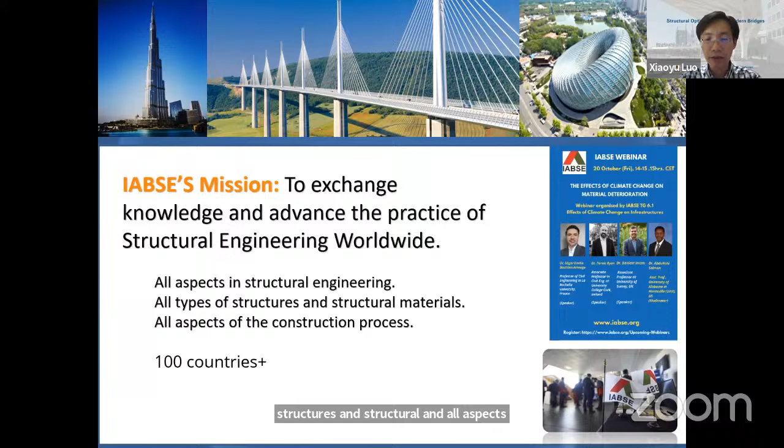Let me introduce IABSE for you first. IABSE is the International Association for Bridge and Structural Engineering. IABSE's mission is to exchange knowledge and advance the practice of structural engineering worldwide, covering all aspects in structural engineering, all types of structures and structural materials, and all aspects of the construction process. Now we have members from more than 100 countries.

IABSE was founded in 1929 in Zurich, Switzerland. Now the president of IABSE is Tina, in Denmark. Our goal covers all aspects of structural engineering: science, arts, planning, design, construction, operation, monitoring, and inspection, and so on.

We have the following objectives: to promote cooperation and understanding among all those concerned with structural engineering and related fields by worldwide exchange of knowledge and experience; to encourage analysis and responsibility of structural engineering towards society's needs; to encourage actions necessary for progress in structural engineering; and to improve and foster cooperation between organizations having similar objectives.

For this purpose, the association organizes conferences worldwide and publishes the high-quality journal Structural Engineering International, which we call SEI, and publishes books reflecting the work of its technical groups. It creates technical groups as required by new needs and technology progress, offers the possibility to join activities within national groups of IABSE, offers a program for young engineers, and presents annual awards.

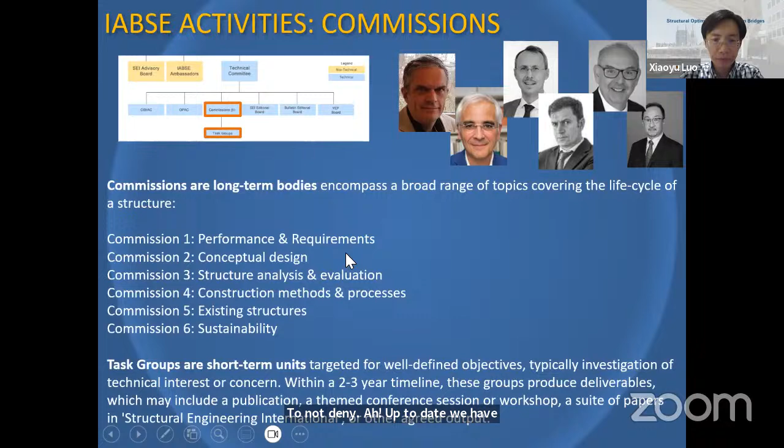We have the activity of commissions. Indeed, we now have 6. To date, we have Commission 2, Conceptual Design. You could find the deliverables and all the successful events from our website.

Under Commission 2, we have Task Group 2.4, Structural Optimization, which is holding this webinar tonight. Thank you, and thank you for your attendance. We also welcome everyone to join IABSE.

Let's continue tonight's webinar. Two topics will be covered. The first addresses structural engineering motivation to design and build new ultra-high performance fiber reinforced cementitious composite bridges, which we call UHPFRC bridges, as cost-effective lightweight structures with original aesthetic expression. Besides stance, basic principles, conceptual design, as well as design optimization and construction will be discussed.

The second topic focuses on structural optimization for pylons of cable-supported bridges, including programming methods of bidirectional evolutionary structural optimization and their application in engineering fields.

The first lecture will be given by Professor Eugen, a good friend of mine, so let me introduce him first. From 1995 to 2023, Eugen Brühwiler was professor for engineering of existing structures at EPFL, the Swiss Federal Institute of Technology in Lausanne. Among his topics, his teaching and research activities include the use of UHPFRC.

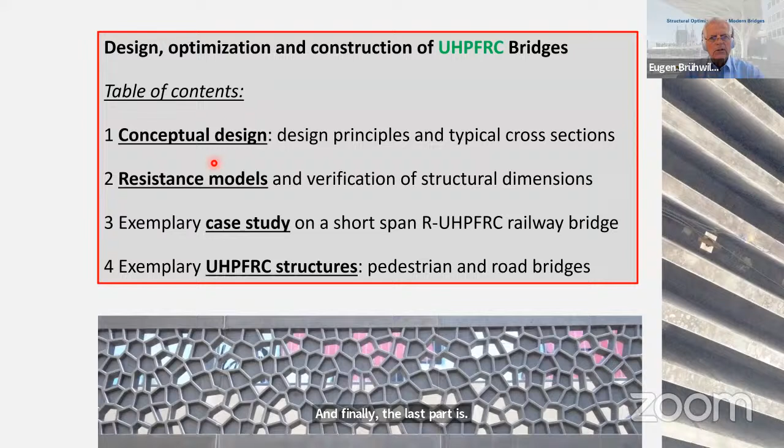The first two chapters are about conceptual design and some basic background regarding resistance models. Then we will look at a case study in order to apply all these principles. Finally, the last part shows you some built UHPFRC bridges.

Now, what is UHPFRC? UHPFRC stands for ultra-high performance, fiber reinforced, cementitious composite material. You see here on screen a cross section through this material. The white spots are steel fibers, a huge amount, and the dark parts are the cementitious matrix. This is a very compact matrix consisting of powders and particles, cement, etc.

It is impermeable and thus watertight, even if you apply a tensile stress under service conditions. This watertightness is actually the guarantee of why this material is very durable.

The fiber reinforcement, the steel fibers, there are at least 3% in volume of very thin steel fibers with a slenderness of 65 at least in this material in order to obtain strain hardening in tension.

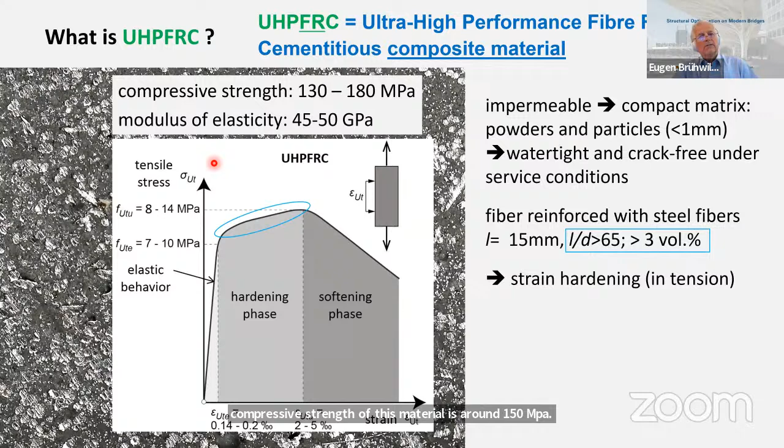We have standards worldwide, in particular a standard in Switzerland that I use often.

Now, why should we build using UHPFRC? The objective is to obtain UHPFRC structures that have a better performance in terms of cost, durability, and environmental impact compared to traditional construction. Traditional construction, I mean reinforced concrete and steel construction in particular. Actually, we take the best of both of these traditional construction methods in order to obtain a new construction method, which also allows for original aesthetics.

We will get lightweight and durable structures with the lowest possible environmental impact. And hopefully this lecture might change your mindset a little bit at least. I will begin with 5 design principles.

Principle number 1: UHPFRC is not concrete, it's also not steel. It is a composite material. It's very important to think in terms of a new type of material.

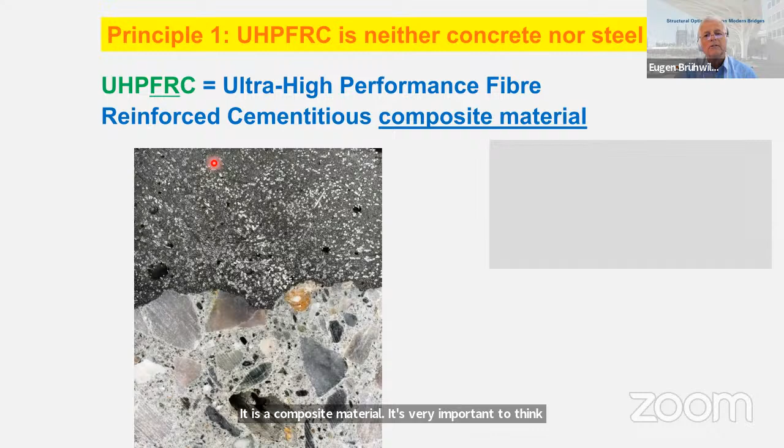The design approach for massive structures like the ones in reinforced concrete does not apply to lightweight structures in UHPFRC. I see several applications using such materials which are quite massive, where you can see the influence of reinforced concrete. Of course, this is not the objective, to replace traditional concrete by this high-performance material. That would lead to ineffective structures, too expensive, too costly structures.

Such materials are under the name of UHPC, which is in many cases just a better fiber-reinforced concrete. They have moderate fiber contents, smaller than 2% in volume typically, and as a consequence, rather moderate mechanical properties. And these materials are, as I mentioned already, designed like reinforced concrete.

This is not the way to go here. So what I'm introducing here today is UHPFRC and the very specific design principles that belong to this material.

Principle number 2 is, of course, we have to explore the material properties of this new material. In particular, the tensile properties: the elastic phase, the strain hardening phase, and also the significant softening phase of the tensile behavior here, the whole domain. We have a quite significant deformation behavior, or in other words, ductility.

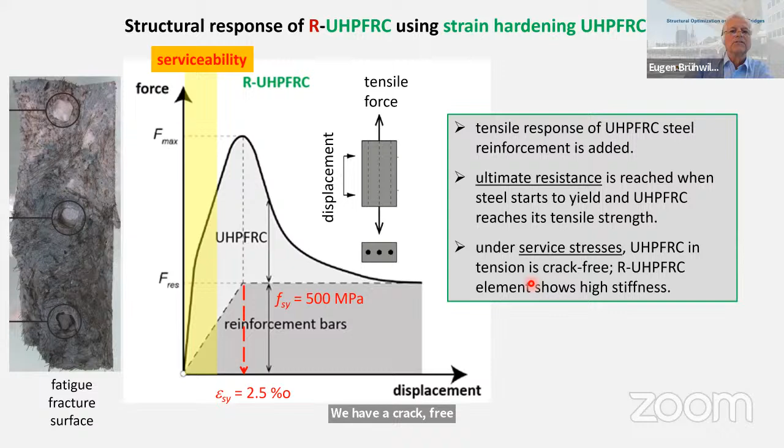Principle number 3 is to design structures in R-UHPFRC, how to exploit the best from traditional reinforced post-tension concrete and traditional steel construction. As already mentioned, we use only the best materials: cement, other reactive powders, superplasticizers, of course. Steel is a high-performance material in terms of fibers, rebars, pre-stressing, and we fully avoid gravel, too much water in concrete. These are the sources of durability problems in concrete.

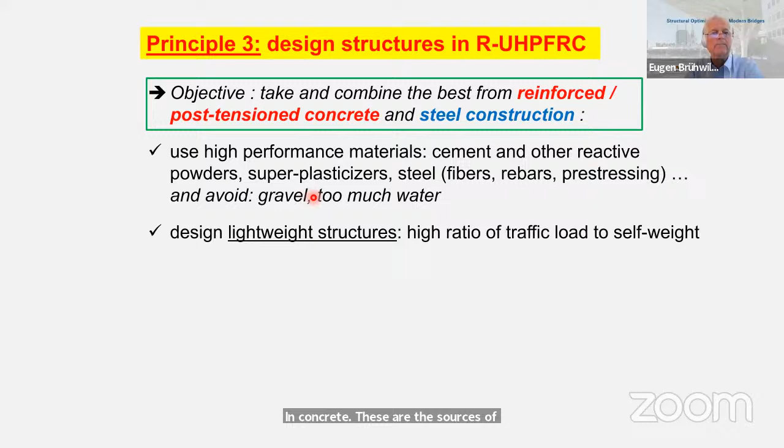And we are seeking and designing for lightweight structures, a high ratio of traffic load to self-weight. We produce precast elements and assemble them by methods of rapid construction that we take from steel construction. We cast, glue, post-tension in order to assemble elements. We do not lose time and introduce problems with welding in order to realize joints.

Principle number 4, optimization of design. The objectives are, we like UHPFRC, but we use UHPFRC with the best possible mechanical properties, and we use the least amount of UHPFRC. So we go for the best, but use as little as possible. That's optimization.

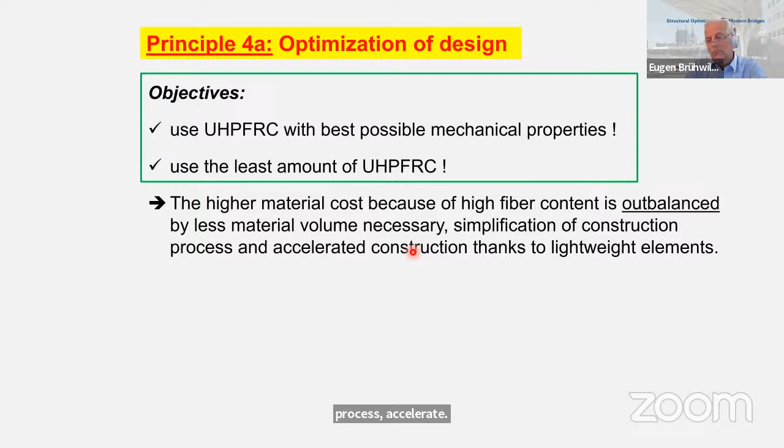The higher material cost because of high fiber content is clearly outbalanced by the lesser material volume necessary. The lightweight elements simplify the construction process and accelerate construction, which also helps keep costs down. Principle 4B, again, is optimization - creating an equilibrium between aesthetics, cultural values and economy.

You see here some points about economy and aesthetic creation: slenderness, boldness, elegance. For the design, the most important thing is to find the best stiffness or rigidity of the structural elements.

Principle number 5 is finding inspiration, and construction history is an extremely rich source of inspiration. For example, François Hennebique, the pioneer of reinforced concrete at the end of the 19th century, is a rich source of what we can do today with UHPFRC. Hennebique would have used UHPFRC at that time if he had the chance to have this material available - he was already thinking in terms of a combination of steel rebars and cement, not concrete.

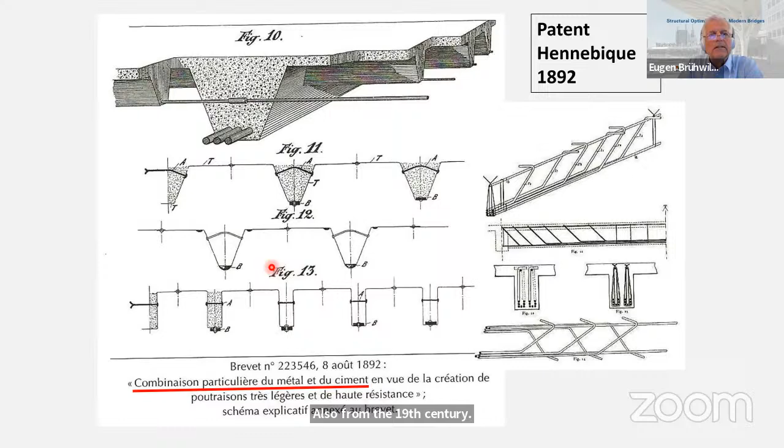So study existing structures made in traditional materials and deduce improvements thanks to UHPFRC. Okay, I would like to summarize this introduction.

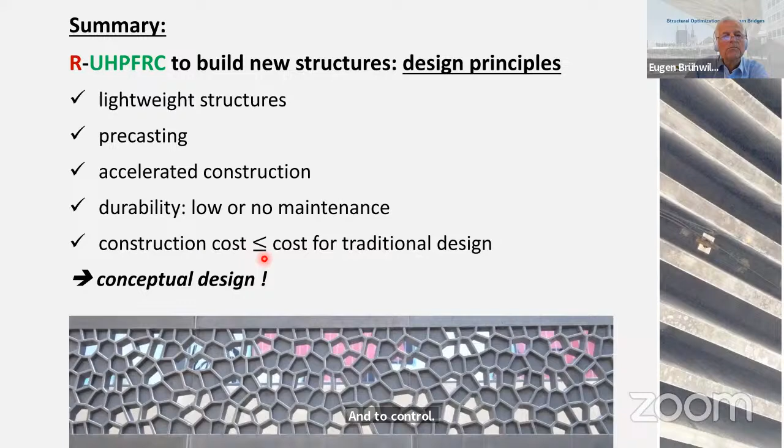We seek for lightweight structures, precasting, accelerated construction. We get durability practically for free, and to control the design, construction cost must be lower than the cost for traditional designs. If you don't achieve this, then your design is not good. In terms of weight, it should be at least 3 times lighter than what you know in case you are a designer in reinforced concrete.

The thickness is such that we can put hollow cores into such a cross-section, pipes for services, and so on. So we are mostly looking at thin slabs and ribs of varying heights, integrating rebars. This is the design approach that we have.

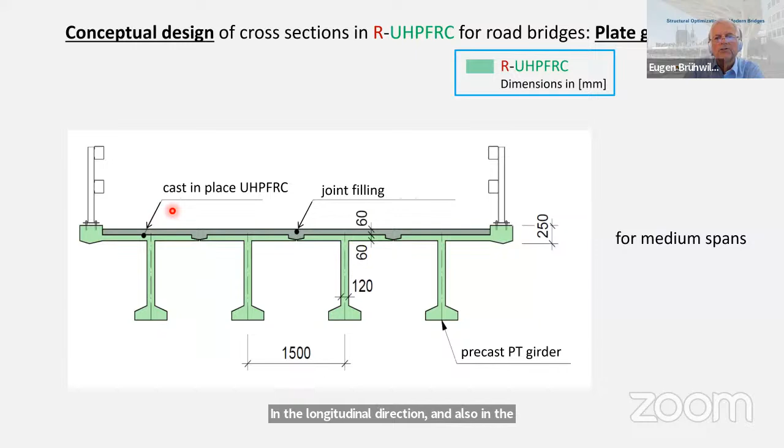Here we look at the box girder, again with ribs in both directions. The slab up here is only 60 to 80 millimeters thin. Of course, we use post-tensioning, which in most cases is external post-tensioning, because we want to keep the web as thin as possible, up to 150 millimeters only. So this would be for the box girder.

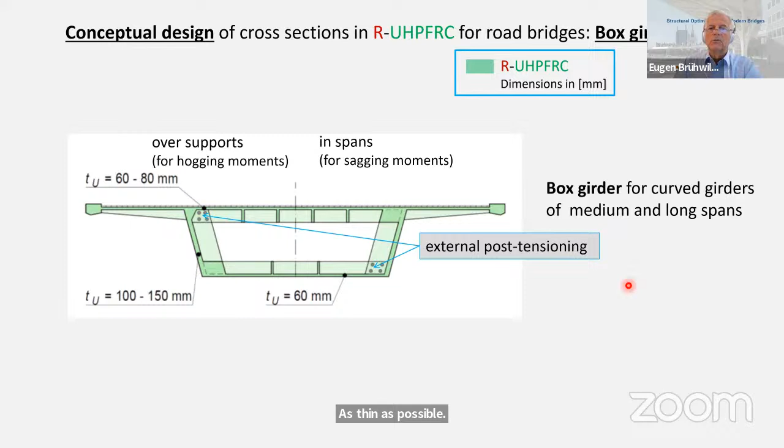For those who are still nostalgic with reinforced concrete, this is a concept of how we should design reinforced concrete nowadays. We can still use reinforced and post-tensioned concrete girders, maybe precast or cast in place, but then the exposed surfaces need to be strengthened here in green with UHPFRC.

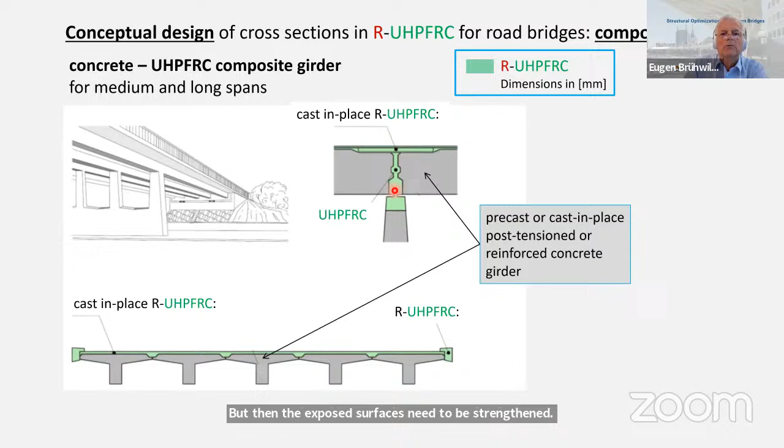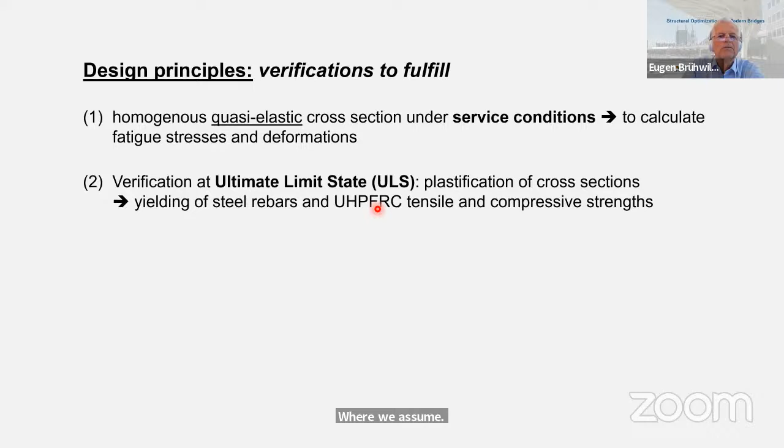So let's have a quick look at the resistance models and how we can verify structural dimensions. Of course, we need to fulfill the common design principles that apply for all construction methods: service conditions, and then the ultimate limit state, where we assume yielding of steel rebars and UHPFRC tensile strength, and on the other side, compressive strength.

Serviceability limit state has to do with deflections, and of course the dynamic behavior is very important since we are working with lightweight structures. But I can already mention from experience with pedestrian bridges that the structures are sufficiently stiff that we do not fall into the dangerous frequency domain in terms of vibrations. Fatigue is, of course, a limit state that we need to check, in particular for railway bridges.

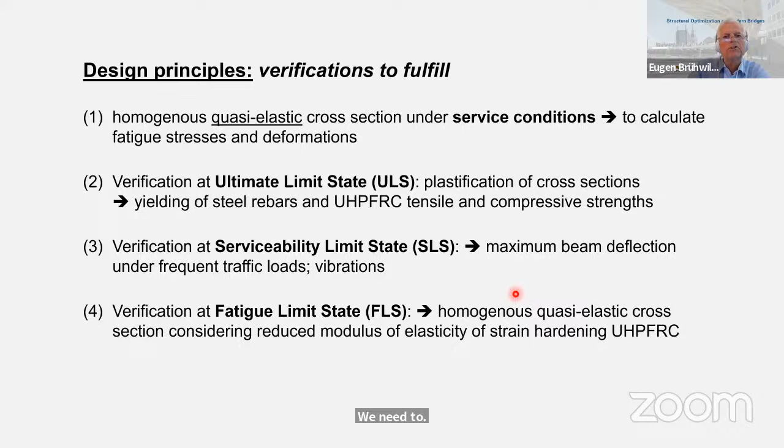The basic format to verify, I think you know all this. We need to find out about the resistance coefficient. We apply in Switzerland, of course, the European concept for dimensioning, and we usually apply a coefficient which is 1.3 for plain UHPFRC.

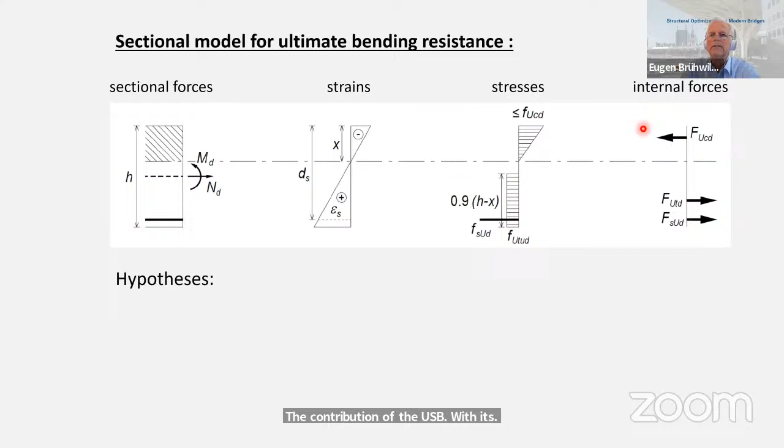The sectional model for ultimate limit state under bending is shown here. We assume that strains remain plane, or cross sections remain plane, under bending. We have a linear distribution of strains. We can then calculate the stresses in the cross section on the compressive side above the neutral axis. We have usually a linear distribution of the compressive stress in UHPFRC, and on the tensile side we have the contribution of the rebar plus the contribution of the UHPFRC with its tensile strength. Internal forces equilibrium allows us to determine the ultimate moment.

Interesting is, of course, shear, as usual. What's new is actually that UHPFRC takes tensile stresses, not only compressive stresses, which enhances the shear resistance to such a point that shear is no longer really a big issue in the design process. So we see some similarity with steel construction, where we usually don't have a concern with shear design.

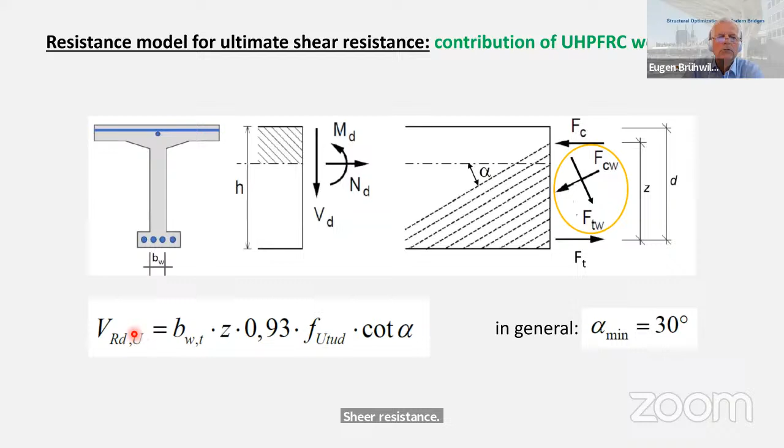Here you see more in detail what the very simple equation is in order to obtain the contribution to shear resistance by UHPFRC. The index U always refers to UHPFRC. Then, of course, we add the contribution of vertical rebars, which can be single rebars - we don't need to put stirrups. Single rebars, well anchored up and down, are very effective in case of high webs, or even integrating post-tensioning cables or pre-stress.

Then fatigue limit state: we need to conduct an analysis of the quasi-elastic sectional stresses. On the tensile side, at the bottom, we have the contribution of the steel rebar - the fatigue stress in the steel rebar - and also the stress in the UHPFRC. Now this stress usually is in the hardening domain, beyond the elastic limit, so that means we need to find this stress distribution by iteration.

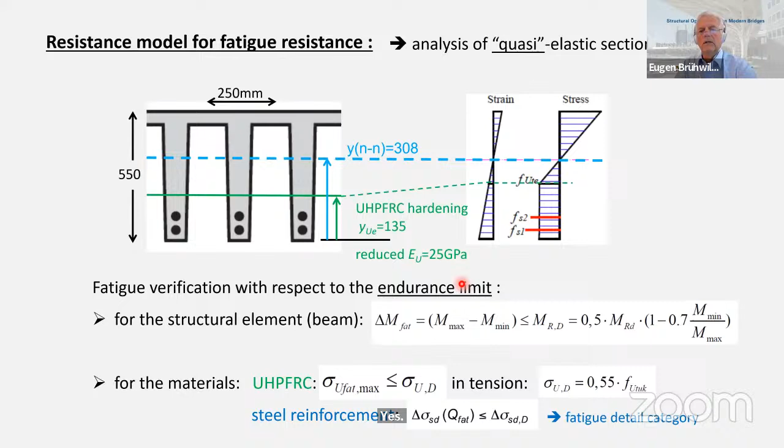Yes, once again, this is for the fatigue design. I will come back to that now.

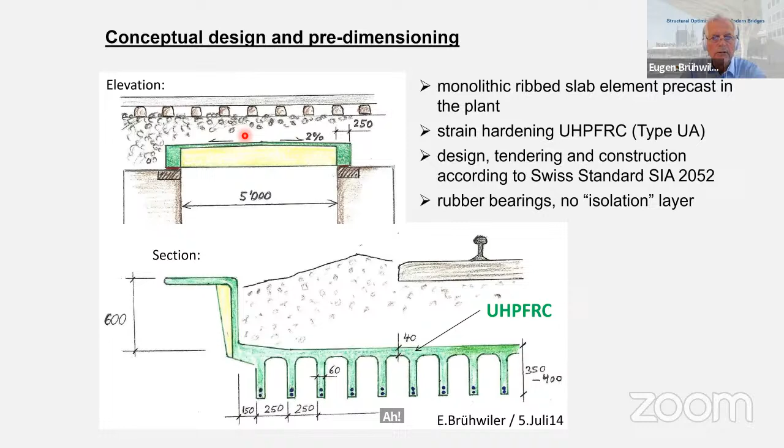This is the third part, the case study of a short span. It's only a 5 meter span railway bridge that we built already 6.5 years ago. I had the chance to follow this design from the initial idea until the quality control at the very end of execution. It's not an impressive structure, but it offers all the difficulties and challenges that you can have in designing bridges, in particular railway bridges, and in particular the design of cross-sections with respect to fatigue, because fatigue was actually the initial, or decisive, design determinant criteria.

So you see on this picture, it is a replacement project of a damaged reinforced concrete structure, and we had a very reduced and limited construction height here. When we look at cost, by the way, it is not just the cost for the material and production of the UHPFRC element - it is also the adaptation, for example, of the railway track, which was not necessary thanks to the use of the new material. And that's a significant cost issue. So what did we build?

We designed a ribbed slab here, a thin slab of 40 millimeters, with ribs containing 2 rebars. That's the slab element, and we have side girders designed for taking impact loads of road vehicles. As I mentioned, fatigue limit state and serviceability limit state was determinant. Here is an overview of this rib slab and the edge girder, with a massive part and the top part, which looks like a structure from steel construction. So the stiffness of the structure was actually really the most important issue here.

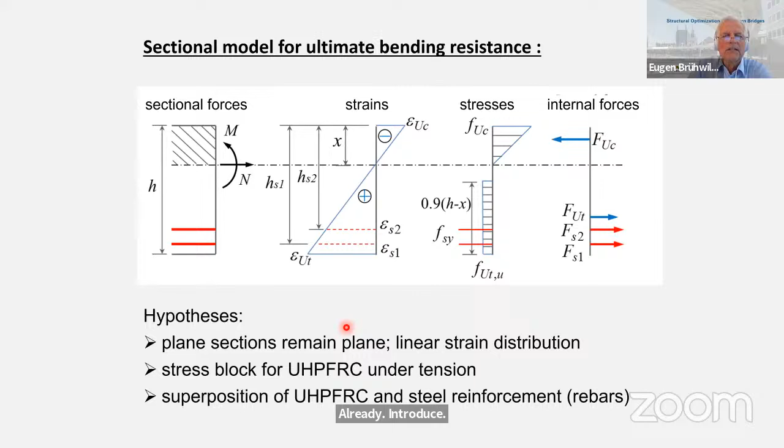Again, we applied this already introduced model in order to obtain the bending resistance, same for the shear resistance. These are hand calculations that I am able to do, and then, of course, the design is always controlled using finite element analysis. But with the hand calculations, you get about 90% right already.

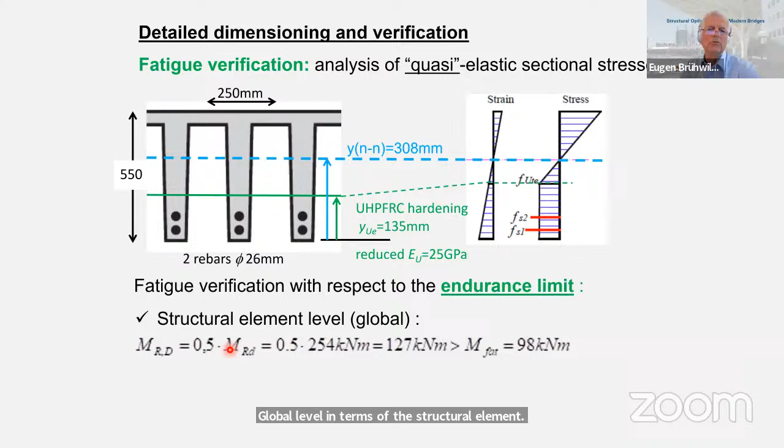Now, with respect to fatigue, very important: we have the lower part of this rib in tension, where we have the 2 rebars, rather thick rebars, in tension, and also the UHPFRC material. It is, however, in the strain hardening domain, and thus loses its stiffness a little bit. We have to find the strain and stress distribution in the cross-section by iteration, but this can be done by hand calculation or with a numerical model. We verify on a global level, in terms of the structural element, a simple verification: we need to keep the stress lower than 50% of the ultimate resistance. This is what this equation says.

And then we check on the material level also locally, in particular that the rebars contain a fatigue stress that is lower than the fatigue endurance limit. That's all - very short and clear fatigue design, but very important in this case.

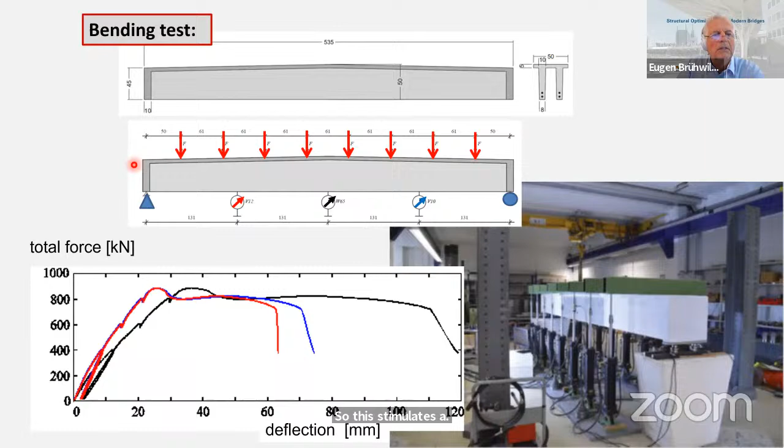We had the chance to do suitability tests on a high girder with 2 ribs. Here we have the bending case, simulating an equally distributed load on the beam. These are the recorded force deflection curves, with digital image analysis in order to recognize and identify some hairline cracks that you would not see by eye.

We have to go up to 73% of the ultimate resistance in order to see some hairline matrix discontinuities, and then eventually we have the fracture. These tests allowed us to determine the beam stiffness, which is an important property for elastic behavior.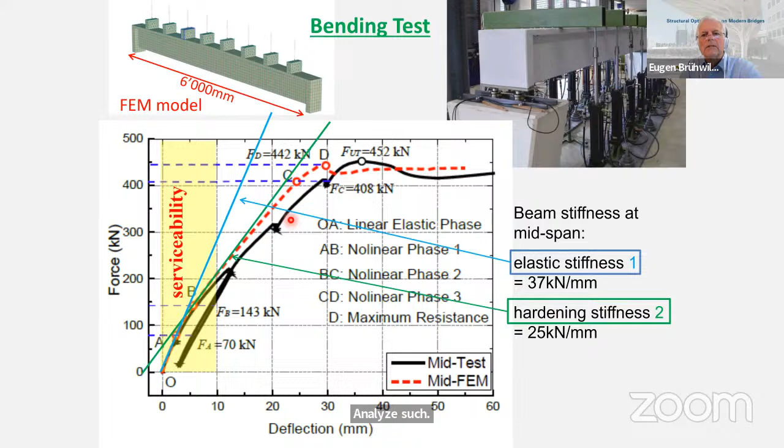Okay, let me go on. Of course, we can also deduce from such structural analysis the cross-sectional stress distribution in order to understand the behavior. We can simulate what is called cracking of the beam, or the cracked zone, and compare with reality.

Let me show some pictures from the construction. All 4 elements were installed in one morning, very fast. We didn't have much time to build all this during a night shift in November 2017. Everything went smoothly - this is very traditional, as if it were an element made of a traditional material. Just a remark: the UHPFRC material cost in this project was 7.5% of the total construction cost.

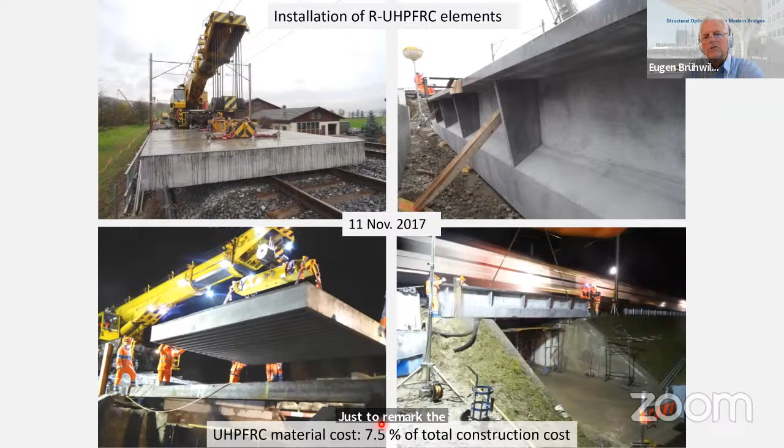Once again, look at this structure after construction and already in service. We did some, or still do, monitoring of this structure, and the allowable deflection of 3 millimeters is by far not reached. This has to do with the over-conservative load model according to European standards.

Over-conservative, which means in this case of a short span bridge, about three times over conservative with respect to reality - but that's another problem we can discuss at some other meeting. We measure a lot of things here. Of course, it's an application with experimental character still, but nevertheless it confirms our design assumptions and expectations.

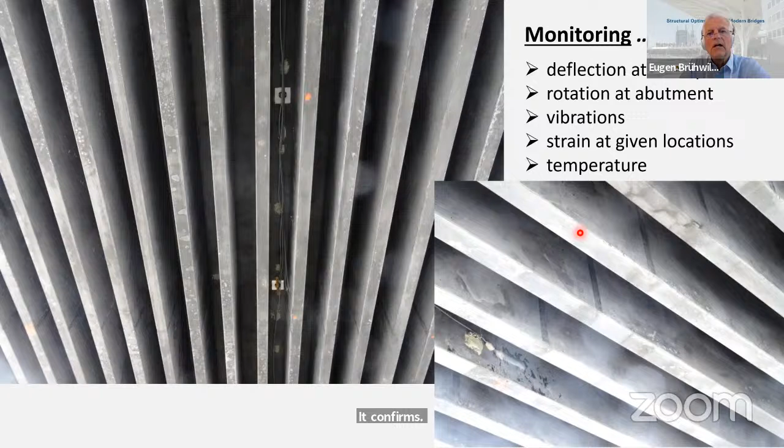This is a view of another short span bridge built 3 years ago, and currently we are working on the next project that will be realized this autumn. There are other projects on the way.

This is a design of a large structure, for those who need large structures in order to be convinced. This is the design alternative in post-tensioned UHPFRC - the cross-section looks more like a steel structure. Down here we have a traditional post-tensioned reinforced concrete design, so we can compare directly the two designs.

For the innovative design up here, we use 4.5 times less building material. We have a 55% lower environmental impact, 22% lower construction cost, 50% shorter construction time. We have all the arguments here - nevertheless, conservative civil engineering will still do the old-fashioned design.

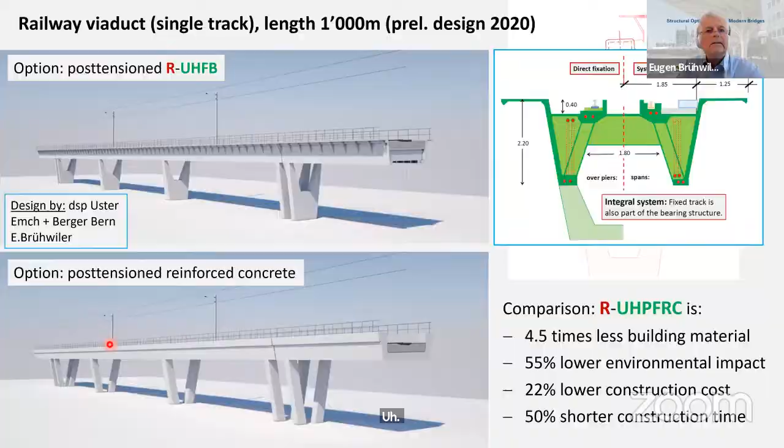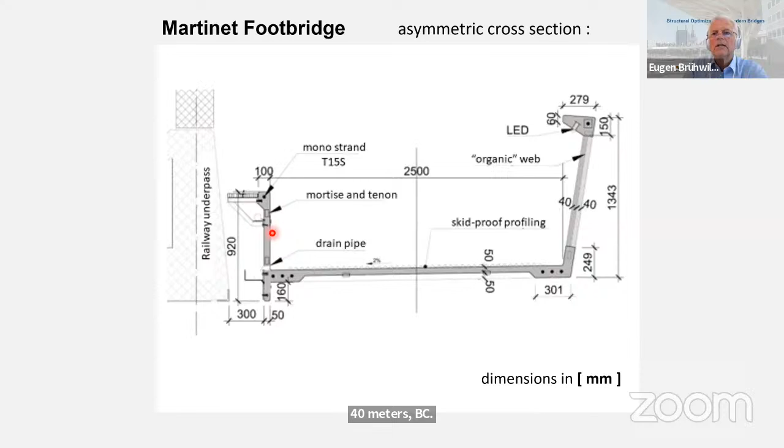And you see here the dimensions in millimeters, 40 millimeters, 50, it's the slab here, and so on. It's lightweight, it's slender. The rebar configuration has only main rebars. There are no constructive rebars like we know them from reinforced concrete.

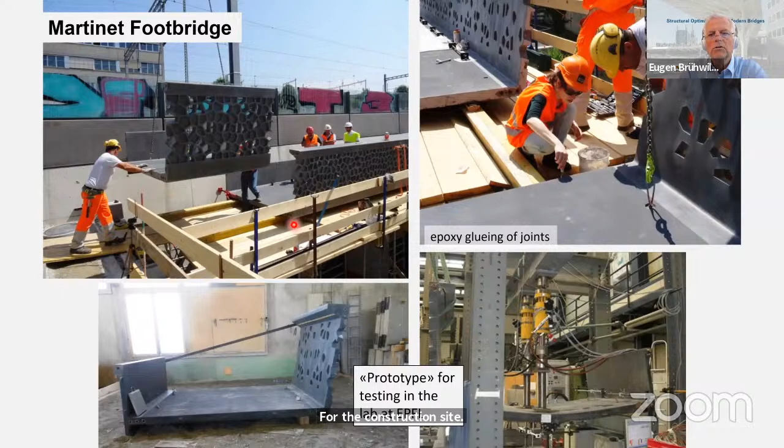Let's look at the construction. This is the matrix in order to produce what we call the organic web of this pedestrian bridge. Installation of the whole bridge, the girder, was done in one morning in an urban area without having lots of place for the construction site. Things are post-tensioned and put together. Here, some post-tensioning - it's a very effective, fast and rapid construction method.

Some impressions from this pedestrian bridge, which has also an experimental character, but works very well in practice. Here, really, we tried out what is possible with this material. Look at this very fine arrangement of details - all of them perfectly well realized.

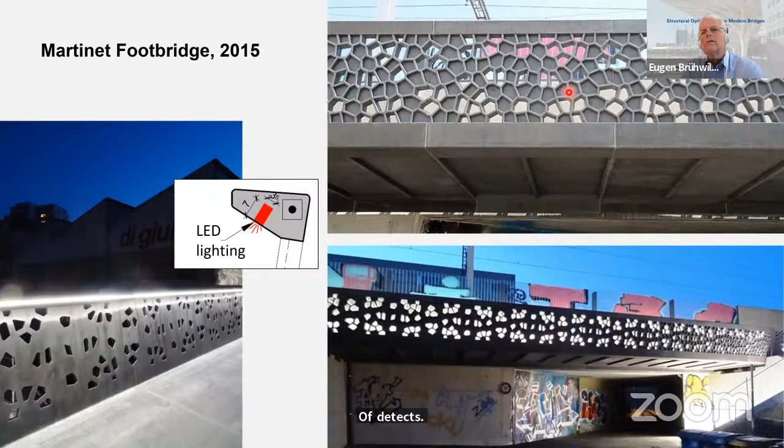Another pedestrian bridge, also with a U-shaped cross-section, from the design sketch to the construction plan, 26-meter span, no particularities to realize in such structures. It became like a routine construction.

Another view, and this is a particular pedestrian bridge over a railway line. Everything is in UHPFRC, post-tensioned UHPFRC. Everything is monolithic. There are no bearings and other things that need maintenance. It's all fixed, monolithic, put together.

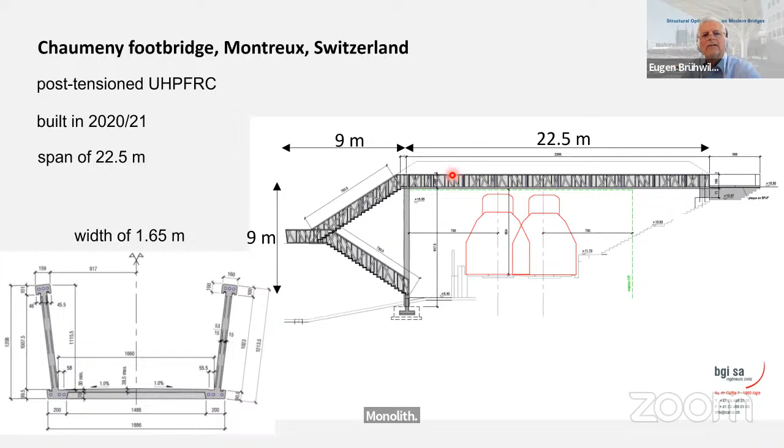It's all precast and mounted in one night over the railway line in an urban area with no access to the construction site. Things were lifted in by a big crane, with the advantage that the elements were, of course, relatively lightweight.

Some other views - we are in the town of Montreux. Some of you might know it because of the jazz festival. This is a road bridge, 26-meter span. Again, we had to limit the girder height to the least minimum.

We have 1.25 meters at midspan and only 0.75 here, because otherwise the construction cost for adapting the road on both sides or going deeper with the river would have exploded. So we have just the perfect solution here in order to accommodate for all these severe requirements.

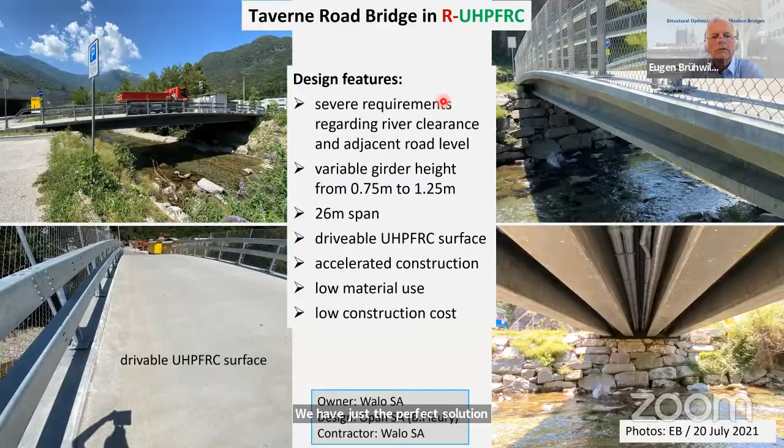And here we fully applied this basic principle that I introduced before at the beginning - precast girders and then cast-in-place UHPFRC in order to form a monolithic structure.

Even though we cast in place UHPFRC, we go beyond this very critical joint detail - there is no dilation joint. We go onto the road, and we have some joint detail here on the roadside. So this is quite original as a detail.

Some impressions from the construction site: precasting of the girders, placing them, casting the UHPFRC. Actually, this process took 5 working days, so that's rapid construction. And the cost was very low compared to other designs - it was by far the design with the least cost compared to traditional designs.

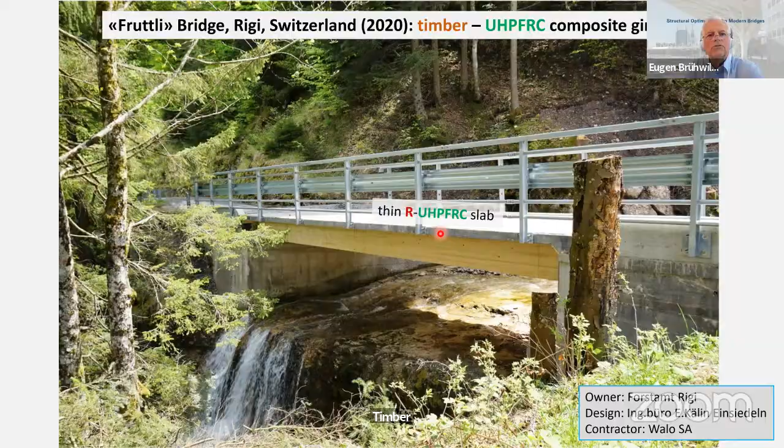Here a composite girder, timber, and a thin UHPFRC slab. Of course, this is very interesting in terms of CO2 emissions. Very easy to be built, in particular using the appropriate material, timber, in an area where we are actually in the middle of a forest.

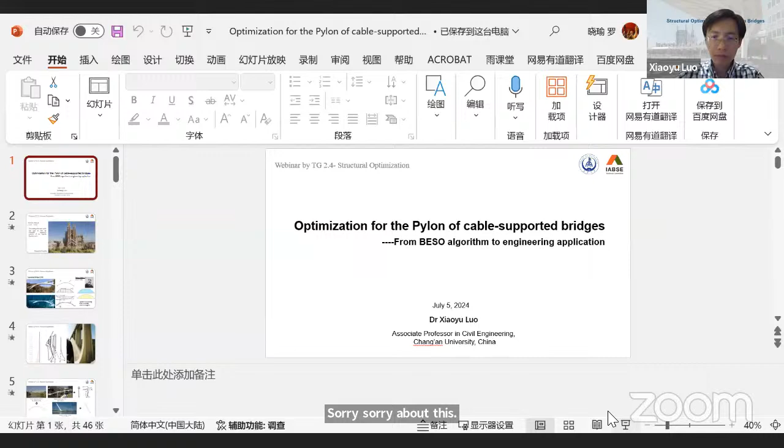My topic is about the optimization for the pylons of cable-supported bridges, from BESO algorithm to engineering application.

When we talk about structural optimization, we could look back to the 19th century. The sandbag cable arch model was used to find the reasonable hyperbola of the Sagrada Familia's vault, a test finished by Antonio Gaudí. The sandbags were used to find the shape, attracted by the earth through gravity. When we put the model upside down, this shape should be the best shape to resist gravity. That's the very beginning of structural optimization.

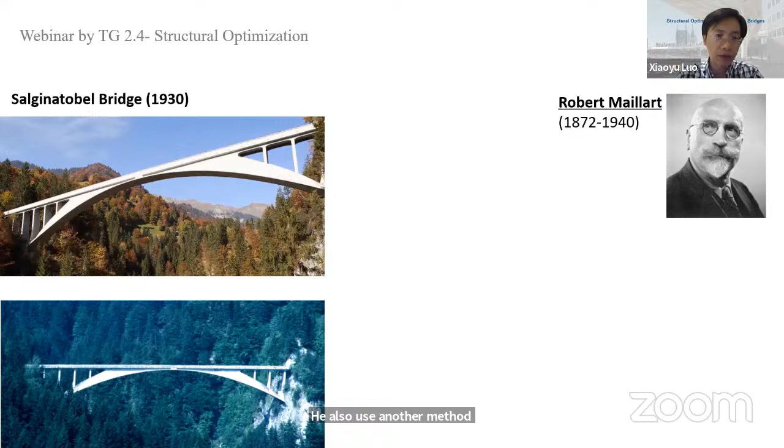Until the 1930s, a famous designer called Robert Maillart also used another method to finish the conceptual design of a notable bridge. He supposed these two points have force concentrations, and with these two force concentrations, the negative bending moment looks like this—this is the same because it's a three-hinge arch. This is the bending moment caused by the horizontal thrust. When we put these two bending moment diagrams together, we find this is the resulting shape, and this is just the same shape as this structure.

So designing or making optimization according to the bending moment is a very useful thing for the structure to have better performance. In this case, Robert Maillart also enlarged the shape of the piers.

Let's look back to the cantilever elements. When the winds are attached to the piers, the bending moment goes like this, just the same shape as the piers. That's very interesting—that means even in mountain regions with strong winds, this bridge will be safe and have better performance.

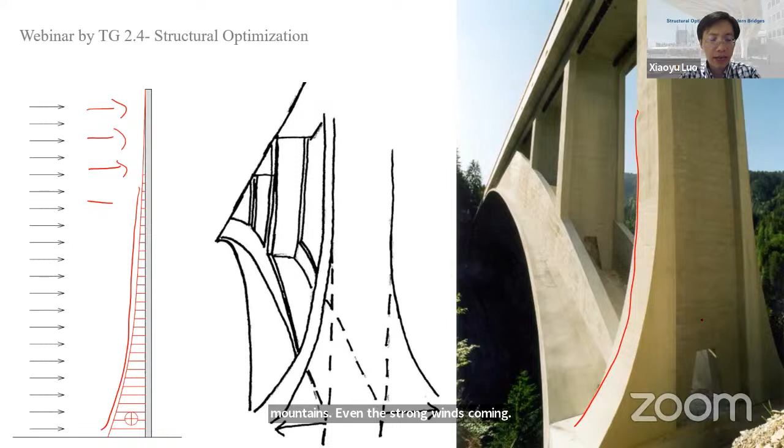Let's look a little earlier, at the Maria Pia piers by Gustave Eiffel. You could find that Eiffel used the same shape as the two-hinge arch's bending moment—the same shape.

That's very interesting. In 1992, the Alamillo Bridge by Calatrava also shaped the pylons according to the bending moments of the live loads. And the Sunniberg Bridge in 1997 by Christian Menn also shaped the pylons—here's the connecting point, or the curved branch points, according to the bending moments. The bending moment here is just zero. This is a very amazing method for structural optimization.

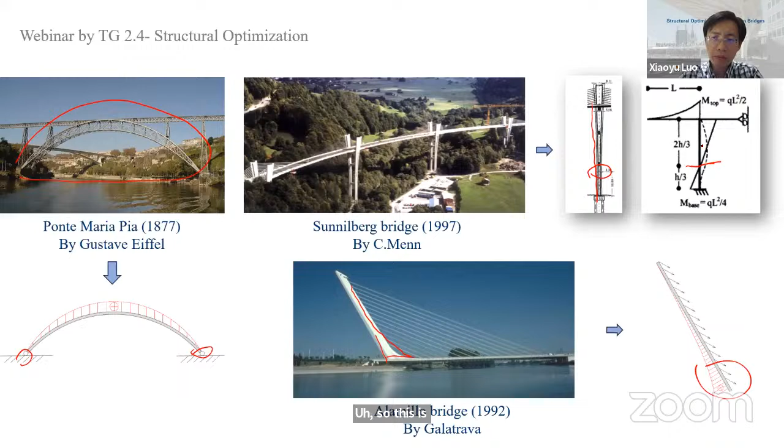But now in the 21st century, we use computers to aid the design. We do structural analysis and drawings—could we also do structural optimization by computer? I think the answer is yes.

So these are our contents about structural optimization by computer. First, I'll talk about the concept and stages of structural optimization. Then I'll explain the theories of bidirectional evolutionary structural optimization, which we call BESO. Then we'll go through the BESO algorithm. Then we'll talk about engineering applications.

When we talk about structural optimization, there are three levels. The most basic is topological optimization. The second level is shape optimization, and the third is size optimization. These correspond to the conceptual design stage, preliminary design stage, and detailed design stage. Let's start from the detailed design stage.

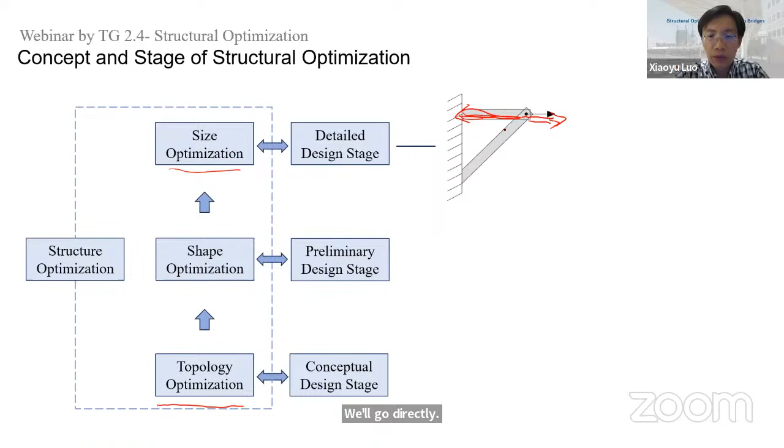But in size optimization, we cannot change the critical points of the structure. We could not change this. We just change the size of the elements.

Second is shape optimization. Take this case: we have a hole inside the plate and we apply a load to the right. The load has to be transferred to the foundation directly, but there is a hole, so the force has to go like this instead - not directly. After shape optimization, the hole becomes more slender, letting the force go more smoothly to the foundation.

But the hole will not disappear under this level of optimization, because we can only change the shape of the hole - we could not eliminate it or fill it in.

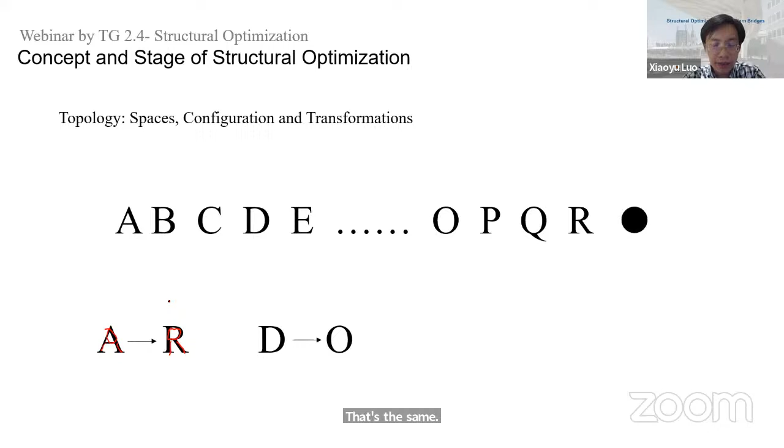In the alphabet, the A and R are the same topology because they each have one shielded area and two bracing lines. D and O are in the same topology because D has one shielded area and O also has one shielded area - different from B, which has two shielded areas.

From D to C, they are not the same topology because C is open while D is shielded, with one area. O has one shielded area, while J has no area inside at all. So this is topology: if the configuration of objects are the same, we treat them as the same topology; if not, we treat them as different topology.

So topology optimization means we could change the configuration of the object freely to find the best shape to support the load. In this case, we have two fixed points, and if we apply two loads from the top middle, step by step we find that the shape will be optimized like this, because in this situation the load is transferred to the foundation directly. This is supposed to be the best configuration for this case.

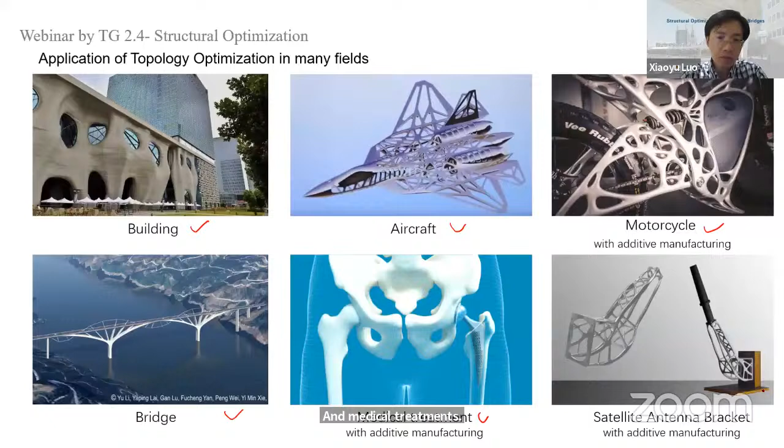Today, topology optimization is applied widely. We find it used in buildings, aircraft, motorcycles, bridges, medical treatments, satellite antennas, brackets - it's very widely used.

Today I will introduce one very simple and easy to use method called BESO. Now we will try to learn something about the theory of BESO. Before talking about the theory of BESO, I will introduce ESO first.

The evolutionary structural optimization (ESO) method was proposed by Yimin Xie and Steven. This optimization method was proposed to improve structural efficiency and shorten the design cycle. The inefficient materials in the structure are gradually removed to allow the structure to evolve into an optimal form.

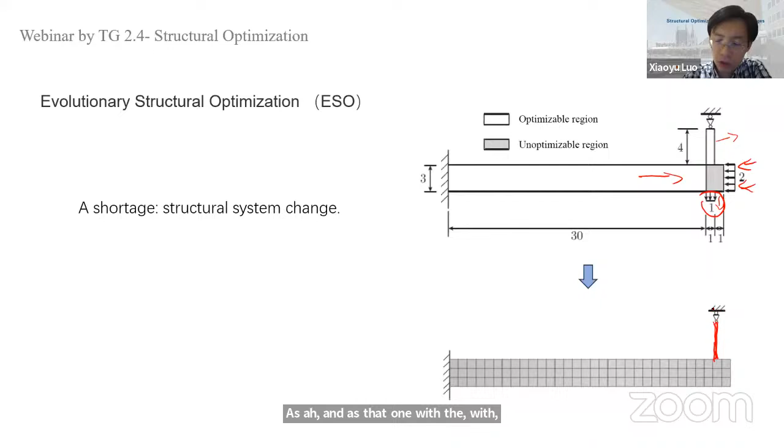Another situation is that the matrix could become singular, like in this case where the stress surrounding here is less, and then we removed elements and some remain in the middle. Now the matrix becomes singular and the calculation stops. Indeed this is not a very good solution.

So how do we treat this shortage? Yimin Xie and Steven proposed another method called bidirectional evolutionary structural optimization, which we call BESO.

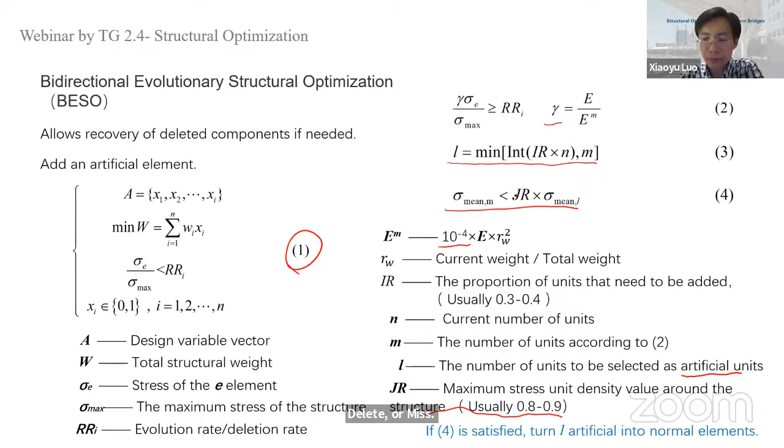There's the question of when to quit the cycle. We need to run the cycle again and again to select useful units or elements and keep them. We need to define sigma max 0 and V0, the very original initial domain, for the first cycle.

In the first cycle we mark them out, and in every cycle we find sigma max at cycle I, and at that time V, meaning the volume at cycle I. Then we compute sigma max 0 times V0 divided by sigma max I times VI, and this is PI. If PI drops during the cycle, then you could quit, and that would be the best suitable solution.

So that's the theory. With BESO, the efficiency was improved like this, and elements like this will not be deleted in the end. Instead they become very slender elements, and this one could undergo optimization like this, becoming slender, while this one is already kept.

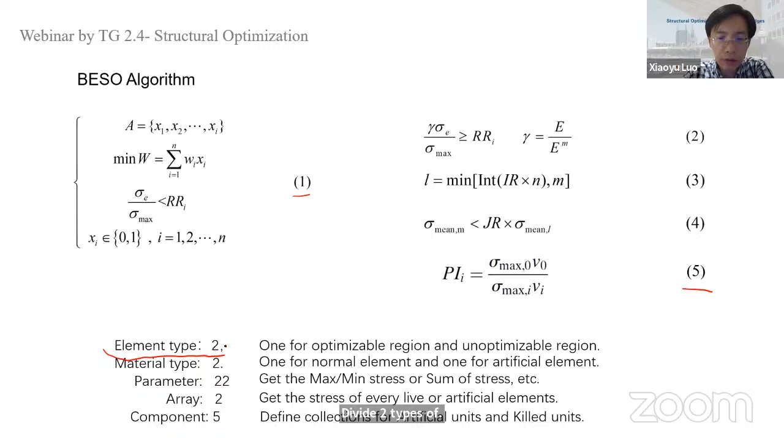When we try to make the program for this algorithm, we need to first define two types of elements: one for optimizable region and one for unoptimizable region, and two types of materials: one for normal elements and one for artificial elements.

For parameters, we need at least 22. We have to get the max, minimum stress or sum of stress, and so on, and element number and so on. For arrays, we need 2 arrays to get the stress of every live or artificial element, one for the live elements and one for the artificial.

Then we have to calculate and determine whether they meet the standard or not. If they meet the standard, we could bring them back. If they don't meet the standard, we could delete this unit finally.

We also need 5 components to define the collection for artificial units and killed units. The component is named group. We put all the artificial units into one group so we can select them easily in the next cycle, and we put all killed units into another group so we can easily select them out in the next cycle to bring them back.

So this is the program. I use the APDL of ANSYS to make this program. First, we divide into 2 element types, using plane 82, and we divide into 2 materials: one for the normal elements and one for the artificial elements. You can see they differ by powers of 10 to the -4.

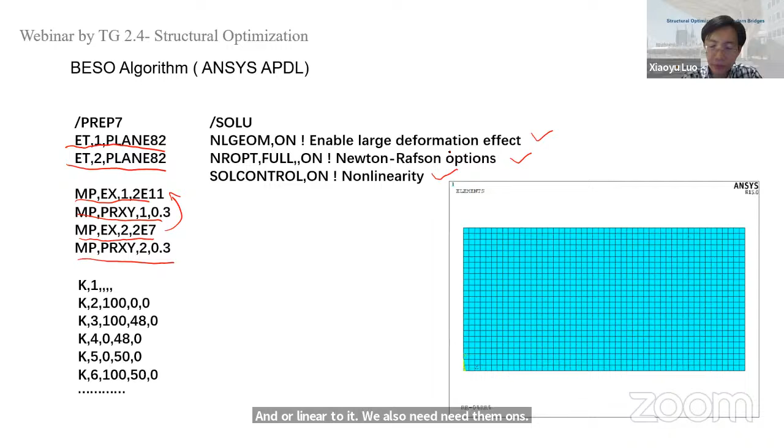After this, we need to set the evolution rate, such as 0.03, and also define the terminal rates, starting or terminal of the evolution, from 0.03 to 0.2, and also set the evolution step. This is the step. Also, because in every step the elements will become fewer and fewer, we have to redefine the mesh to keep it good.

So this is the command for redefining the mesh. Then in the program, we have to set parameters to get the stress in every cycle: the maximum stress, minimum stress, the sum of the stress, and so on, and the amount of live structural elements.

This part is actually somewhat difficult. You can pause the screen, and after this webinar you can try it in ANSYS or another programming language — it would be the same.

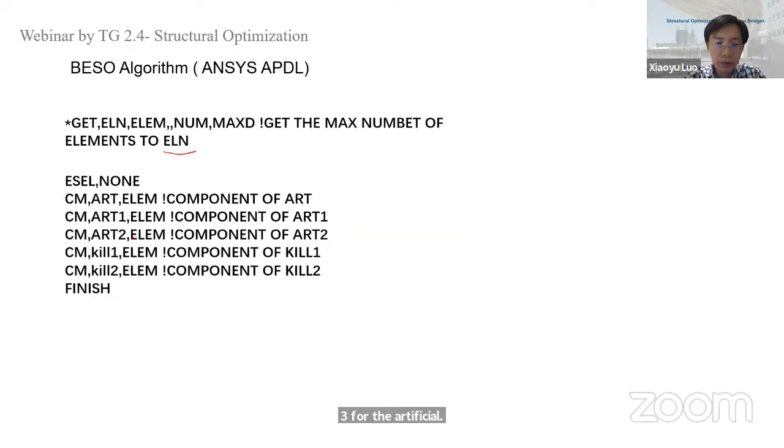Then finish, and we give the boundary situation, like fixing here and applying 2 forces in the middle of the top surface, and then we solve.

After the calculation, the first important step is the post-processing — we get all the stress into a table, and get the measurement, the sum of the stress, meaning all the units' stress summed together and given to TS.

Then the amount of live elements will be counted and given to SEL. Then we find all the live structural elements and their stress, and give them to the result array — this gets the stress into the result arrays.

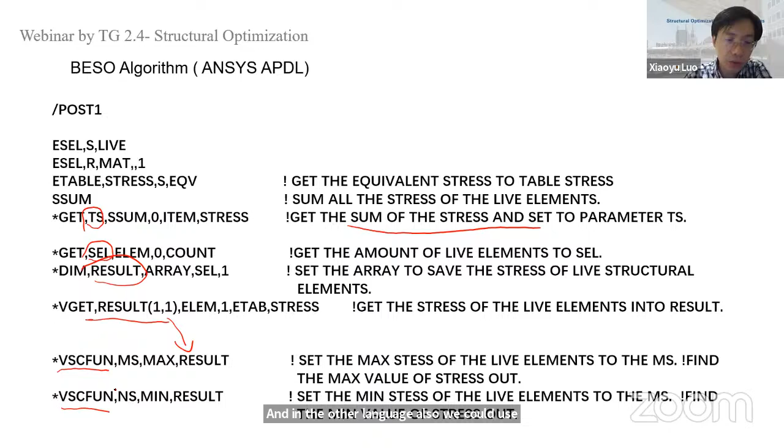Then, between these result arrays, we have to find the maximum stress unit and the minimum stress unit. We could use the VSCFUN function in ANSYS, or the same kind of function in other languages, to find the max and the min for the next calculation.

And then we select the type, and we select mat1. This is the standard, R0 is the evolution rate, and ms is the stress, and we select this element with the low stress. This means less than R0 multiplied by ms. All the stress less than this will be selected and killed - kill this material or kill this unit.

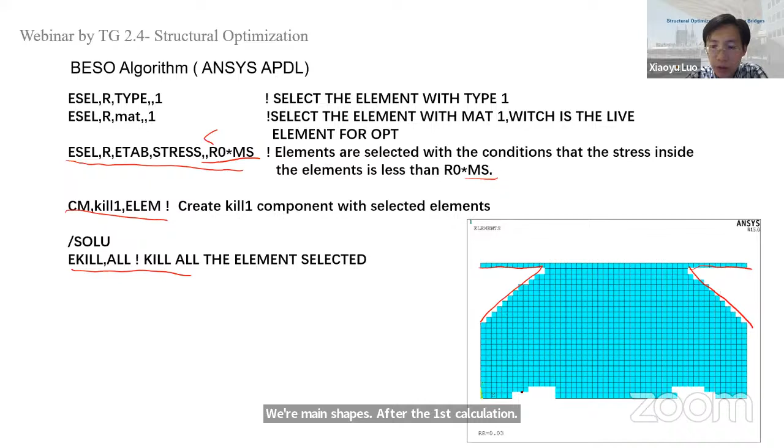And this is the main shape after the first calculation, and we could see that this part with low stress was killed. But this is just for the ESO - we just kill the element, but we have to get them back with the artificial elements. So now we have to do the artificial ones.

We all know that each element has four faces, 1, 2, 3, 4, so we set the face 4. That's for 2D. If for 3D, we know that they have 6, so this face should be changed to 6 in the 3D situation.

And we have to find out the elements adjacent to this one - 1, 2, 3, 4 elements adjacent to this one. And then we will select, if they have, we select them now. 1, 2, 3, 4. And if this 3 and 4 belong to the live elements, then we have to select them out and keep 1 and 2. This is the artificial elements.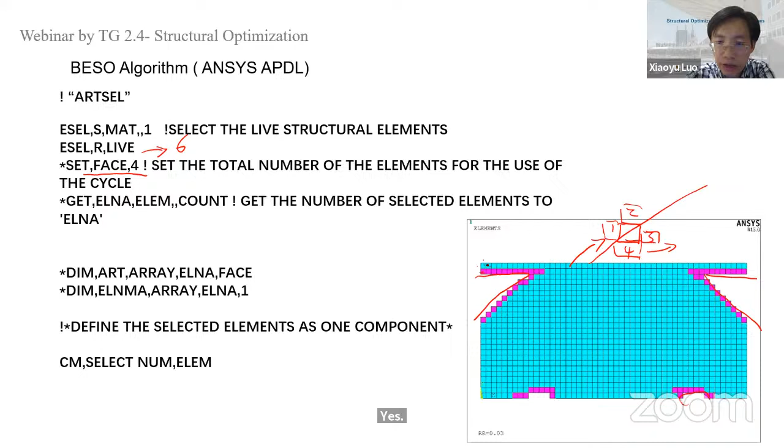You see, this one we have nothing, yes. So these 2 are yes, 3 and 4 are yes. But 3 is already a live element, so we have to select it out. Here we have to select these 3 out and keep element 4, becoming the artificial elements.

From a cycle, we have to tell one by one, and then we find all of the elements adjacent to all of these elements, and then we select. Here we select the live element, and then we keep the element adjacent to the existing elements.

So by this way, we can choose the artificial element out, and this 4 is the artificial element - by selecting all of the adjacent faces, and then we select the live elements. And then the remains should be the artificial ones.

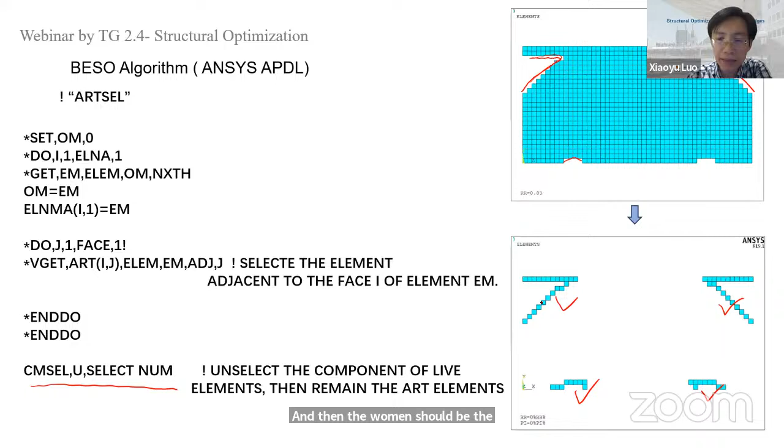And then we will do the next calculation to tell if this is large enough to be kept or not large enough. Then we will remove this element at that time. So this is the artificial element step that we have to define.

And then if we need to keep it, we will change MP to material 2 and leave them all - that means call them back to be the artificial element. And next round, we have to tell if the stress in this element is becoming larger or less. If larger, we give them back, and if less, we remove them at that time.

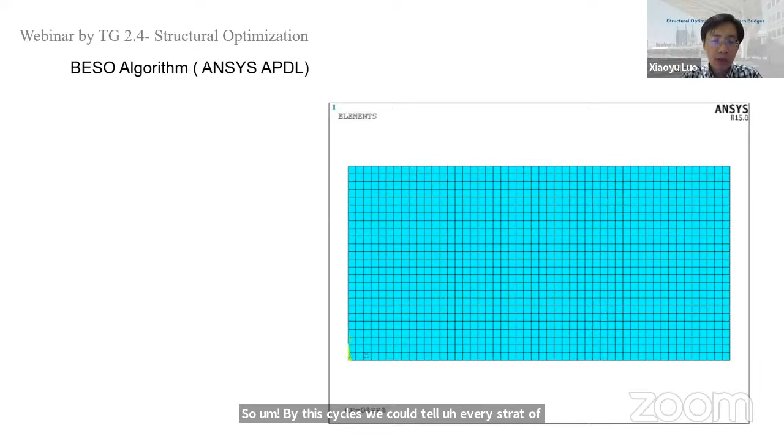So by these cycles, we could tell every stress of every unit, and then we delete them or get them back. So step by step, the shape of this structure will become the best suitable shape, getting out step by step.

It's worth mentioning that in this step, indeed this element was isolated at that time, but nevertheless, because we could get the artificial material back, it didn't become strange, so the calculation could carry out.

And a very interesting phenomenon is that we could go from the maximum number of elements and step by step find and delete. And actually, we could start from the minimum number of elements, and step by step the artificial element will be added, and the necessary one will turn back into the normal elements finally. And the low stress one will be removed, and then step by step we could find out from there.

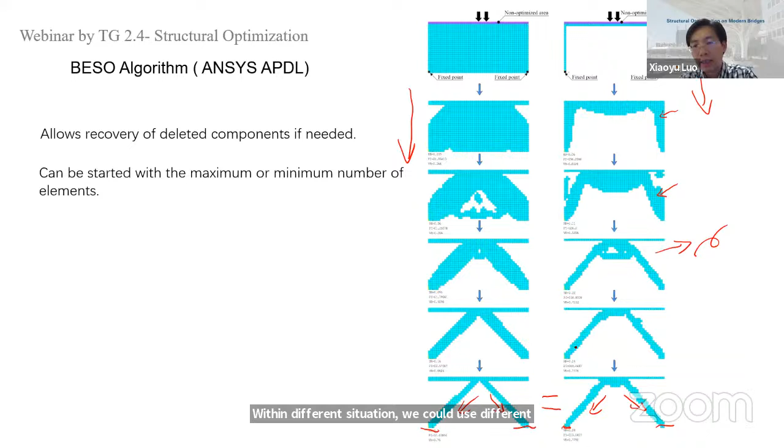So within different situations, we could use different methods. One is delete step by step, the other is get them back step by step. And the MP ones - queue all the MP ones first and get them back step by step. These are two very interesting algorithms.

And so by this method, I think you should know the theories of BESO, and you should know how to make the program of BESO. Now we could take a look at the engineering application.

Here is the first case, the Hangrui Dongting Bridge in China. This bridge is a suspension bridge with a main span of 1,480 meters. That's a long suspension bridge, and this bridge is located here.

This is the Yangtze River, Changjiang in China, and this is Dongting Lake in Hunan province. It's worth mentioning that beside the bridge site, they have this very famous traditional Chinese building called Yueyang Building. In this building, we could find good reference, and the aesthetic effect is good.

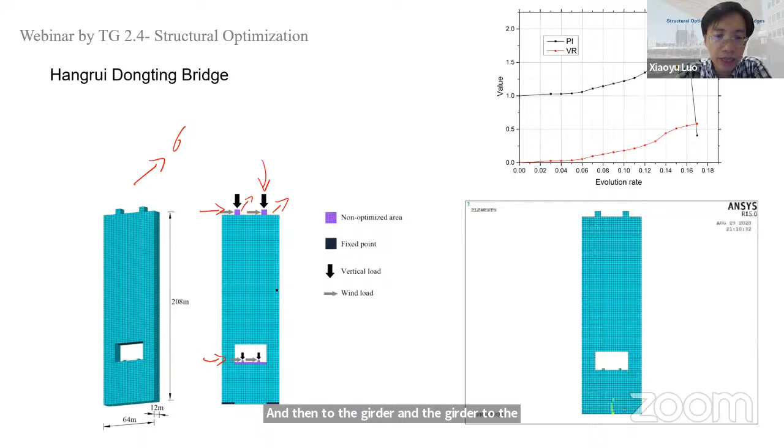And we have the loads. The vertical is a strong load from the whole cables to the pylons, to the towers, and then the wind load to the saddle, and then to the girder, and the girder to the bearings like this. This is the load situation we have to give.

And then we could do the calculation step by step, and you can find out step by step the shape will be calculated like this. And the interesting thing is that when the cross beam here was removed, the calculation stopped.

That means you could see that the PI is going up and up and up, and suddenly it falls, going down. That's because the connection between these two columns was removed, and then the stress will not be good, and the PI will drop and the calculation will stop. So the biggest situation will be like this.

The PI at the most high point is the best suitable situation, like this, okay. With the cross beam, that would be the suitable one.

And actually, during the designing process, we argued about the shape of the pylons. I myself preferred one connection beam, others said two is okay, and others said three is better. So we argued all the time until we used BESO to find the shape. Then I said one cross beam is enough for this bridge, and then the argument stopped.

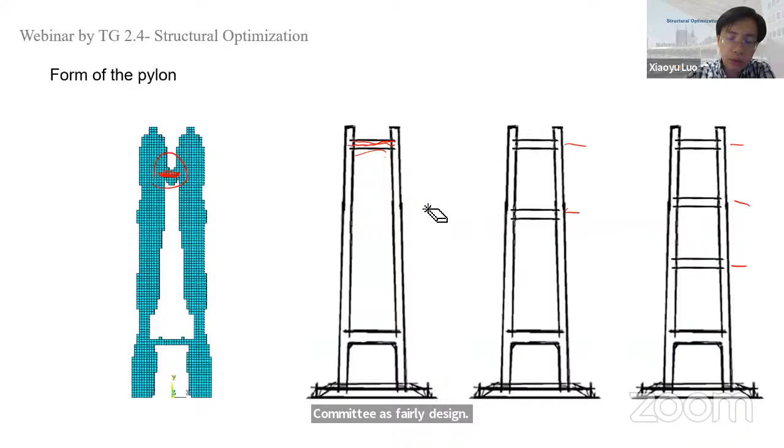Under this situation, yes, this is just the structure. We have to step by step design, to give the feature to the pylons, and then it's easy to be told. We make investigation into the culture and the buildings, and something. And this is the flute.

You know the flute, pan flute with good music, it's going up step by step like bamboo, which is interesting. And the Yueyang Building, just like 1, 2, 3, 4, that's interesting.

So we decided to use this reference to design the pylons. Then we use 1, 2, 3 steps, using the section from small and then large again, for these pylons. We use the circle to connect the two columns up to this shape.

But we need to give lightning rods to the towers to prevent lightning strikes. So after the lightning rods were given, we made the decoration, and it lets the bridge look elegant.

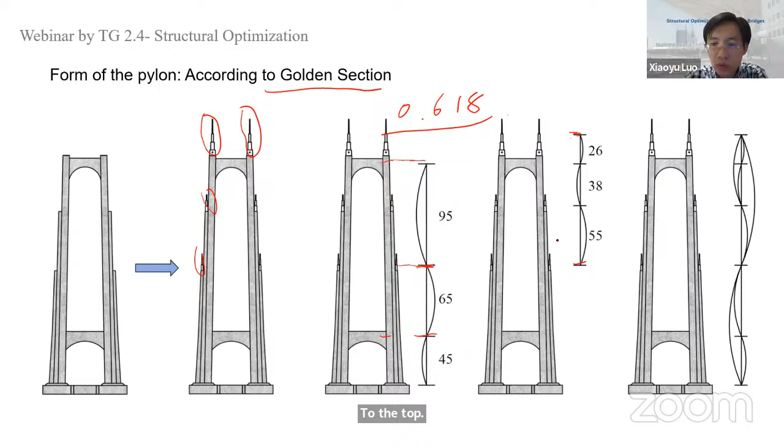And then you could find out that from this part it's not easy to be solved by people. So we start from here to the foundation. All of this height of the pylons, we use the golden section to arrange every detail so that the bridge could look elegant and beautiful.

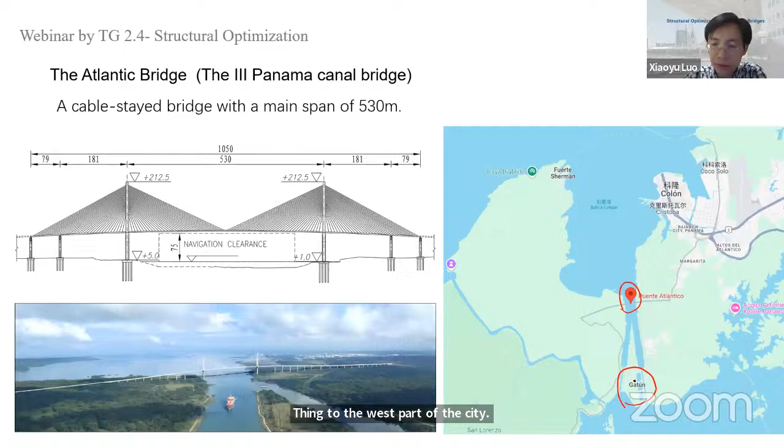Before we did the BESO analysis, the designing group made an analysis for seismic action, and they found that the lateral displacement of the pylon heads will be decreased with the lower part of the pylon dimension increased until 20 meters, and the lateral displacement will be less, because Panama is a country with strong earthquakes. So we have to take the seismic action into account before we do the conceptual design.

So this time we just put this lower part at 60 meters wide, to restrict the lateral displacement on the top. Then we remove all the unnecessary materials and just keep the important ones. Then we give them loads, wind loads, and this is also the basic model for the transportation. This was kept for the transportation, but later we remove the useless elements and keep this one for the calculation.

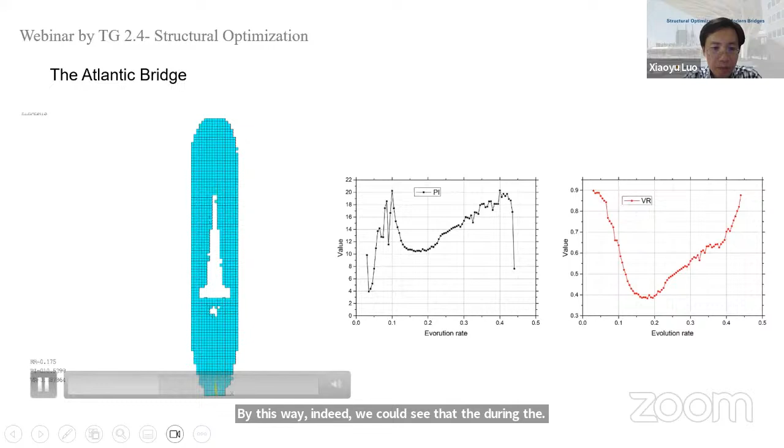By this way, we could see that during the optimization process, step by step, the unit was added back, and then removed again, and later finally reaching a shape like this.

From the process, we know that the PI becomes two peaks. Firstly, to this point, but not the highest. And this time the VR is going down, not to the end, so we tell that this one is not the terminal. And then to this one, they dropped dramatically, so this one would be terminal. The PI is going up, but the VR going up and PI dropping - they are inverse, so we terminate the computer cycles, and this is the final shape.

So I mean, the BESO optimization lets us follow the best use of materials, but sometimes for a modern bridge that's not enough for the aesthetics. So we still need to put some effort into designing these pylons. And what's very interesting is the lock.

The lock of the canal goes in a V shape. So we use the V shape here and here to design the pylon, according to the BESO solution, the BESO answer. But actually this lower part was just not so elegant, too strong. So we put a curve inside the columns, outside the columns to put a curve, and with this curve the bridge could look more slender, not as strong as the first one.

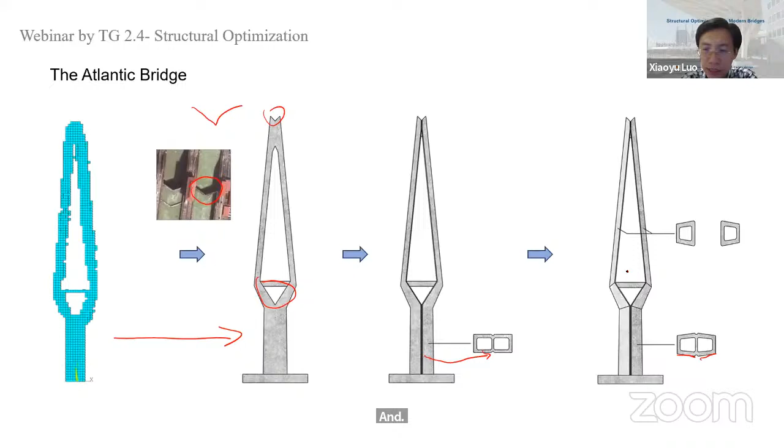And then we also use the V shape for the section - you see, this is also a V - so that the pylons could look right in light and shadow, more slender from the contrast of light and shadow.

Then under the calculation in the real project, we found out that here the stress concentration is still a little bit high, so we had to fill these areas like this. We also used the square proportion method to optimize the shape of the pylons, and also used the golden section like this. This one is almost like the golden section for the width of the pylons. And for the deck, the height of the deck and the total height of the pylons, we also used the golden section for the arrangement. So from the very beginning, from the BESO results, step by step we made the optimization for the shape of this tower, and made it like this finally.

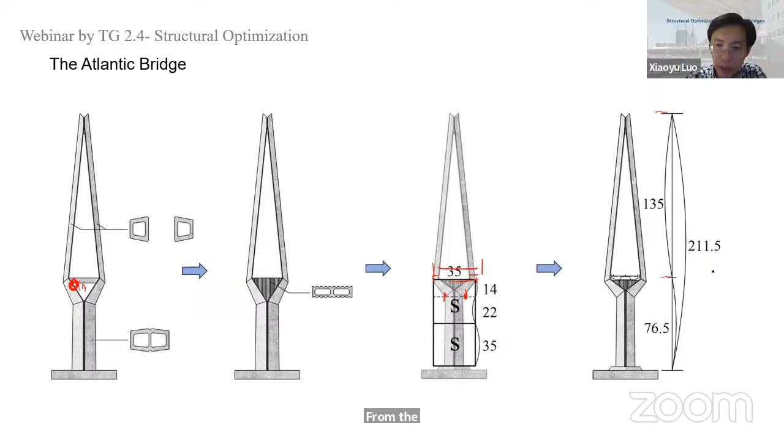This bridge was constructed from maybe 2015, 2013, and then this bridge was finished in 2019. This is the Atlantic Bridge, and this is the construction stage. You can see the light and shadow, and the pylon looks a little bit elegant with the curve, the cut, and the light and shadow.

This is the image taken after the bridge was constructed. I think this way we are finding pylons or towers good to resist seismic force, and also have the best performance under wind and vertical loads through the use of BESO. So this is my lecture about the BESO algorithm applied to the practice of engineering. Thanks to all of you for listening to this webinar, and thanks to all.

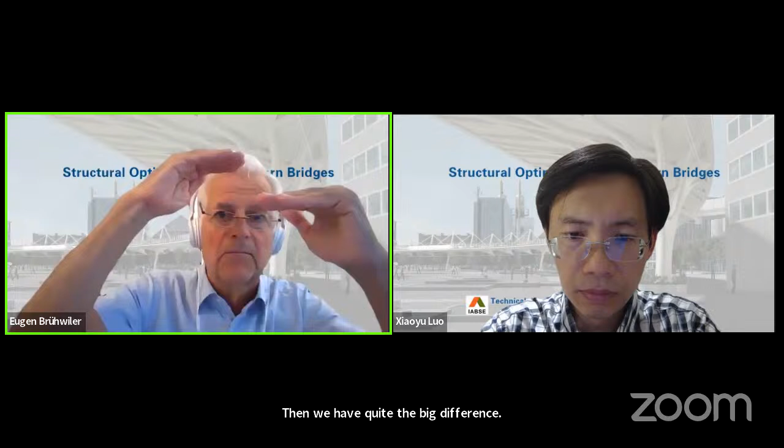The third question is about the application of UHPFRC in composite beams. As I mentioned and showed with examples, it's a very effective method and material for composite designs, either with steel or with timber. The reason is UHPFRC is much better than a concrete slab. Concrete is a traditional material with rather moderate properties. If I put concrete here and steel here, there's quite a big difference. But if I have UHPFRC on this side, we are much closer, almost equal partners. This combination is much more interesting and technically efficient than when there's a big difference. That's why I'd encourage you to consider UHPFRC for composite construction particularly.